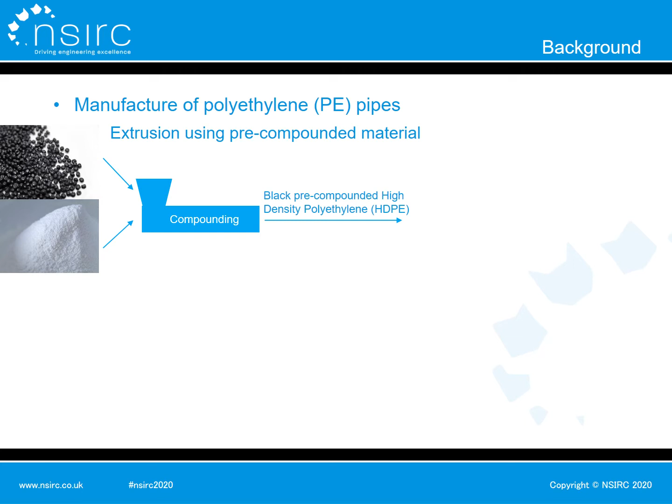There are two manufacture processes of polyethylene pipes. One is single-screw extrusion using pre-compounded material, in which carbon black master batch granules and high-density polyethylene powders are first compounded using a mixer to produce a black pre-compounded HDPE. Then the black HDPE is fed into a pipe extruder to produce a black polyethylene pipe with good homogenization of carbon black and HDPE.

Another manufacture process of polyethylene pipes is inline single-screw extrusion, in which a dry mixture of carbon black master batch granules and HDPE powders are fed into a pipe extruder directly to produce a black PE pipe. In this manufacture process, insufficient homogenization may occur because of improper screw design or using improper mixing elements.

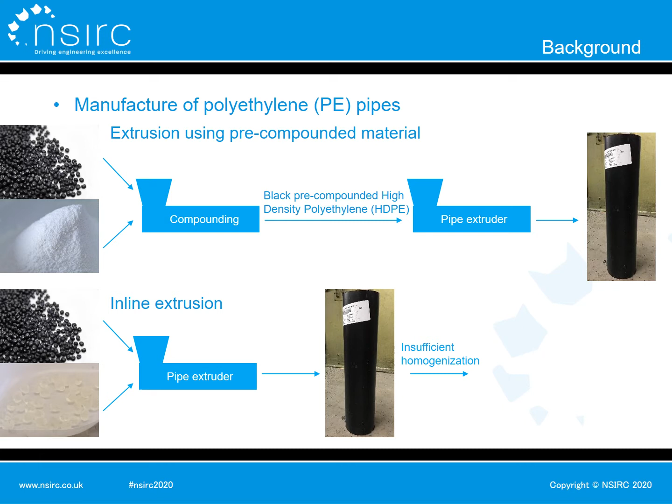Although the pipe made by inline single-screw extrusion may seem totally black by naked eye, when cutting a thin layer from the pipe end, some white regions can be seen. If we magnify and focus on one small white region, we can see some white striations or swirls with no carbon black, and black regions with high carbon black concentration surround the white striations.

These white striations are called windows. The existence of windows may induce stress concentration, therefore influencing the butt fusion joint integrity of polyethylene pipes. What is more, if the bond at the interface between windows and the black regions is weak, the butt fusion joint integrity of PE pipes can be significantly influenced. In addition, the black regions with high carbon black concentration may need to be concerned as well.

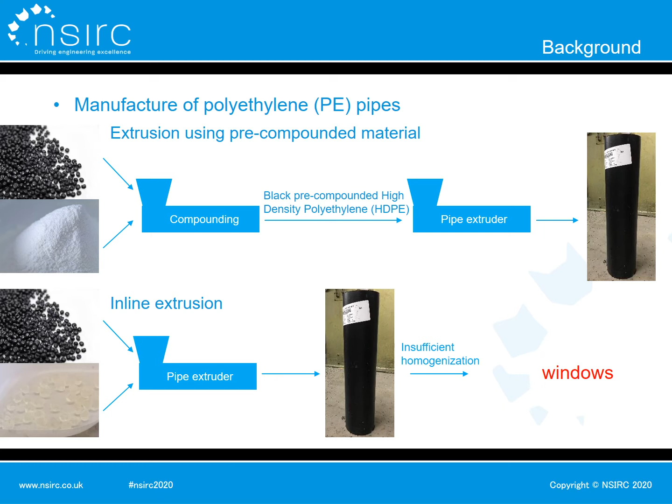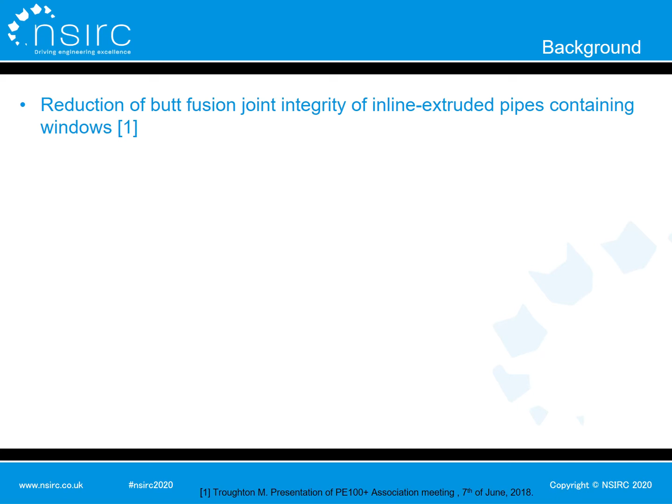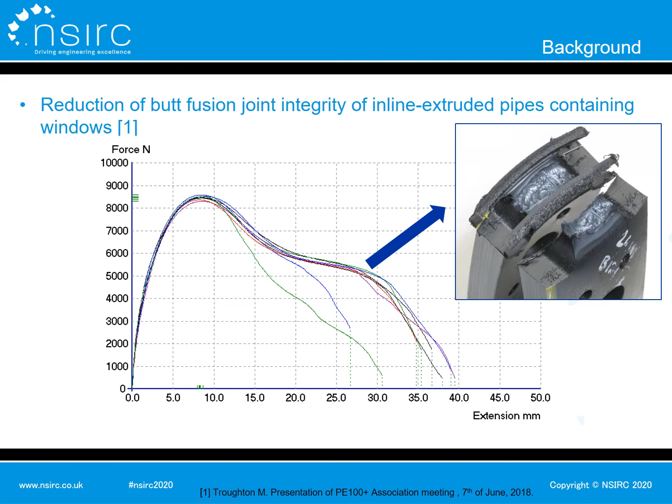TWI has done a study of the butt fusion joint integrity of polyethylene pipes containing windows and polyethylene pipes without windows. The tensile test specimens of the pipes without windows all fractured in ductile mode, with high extension to break and energy to break. The test specimens of the pipes containing windows fractured with lower extension to break and energy to break. Some brittle areas existed in their fracture surfaces.

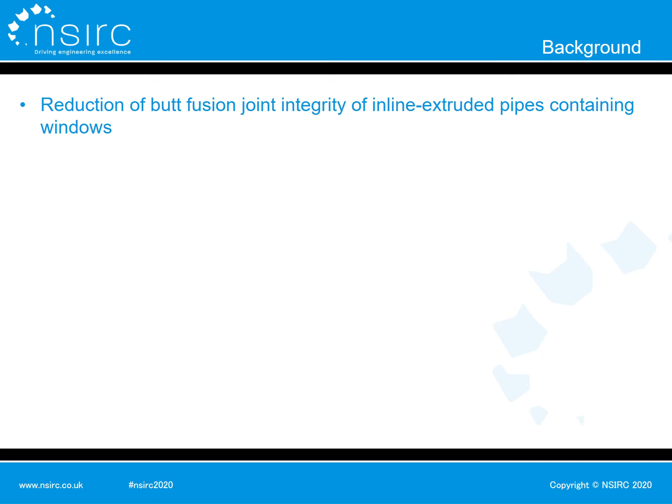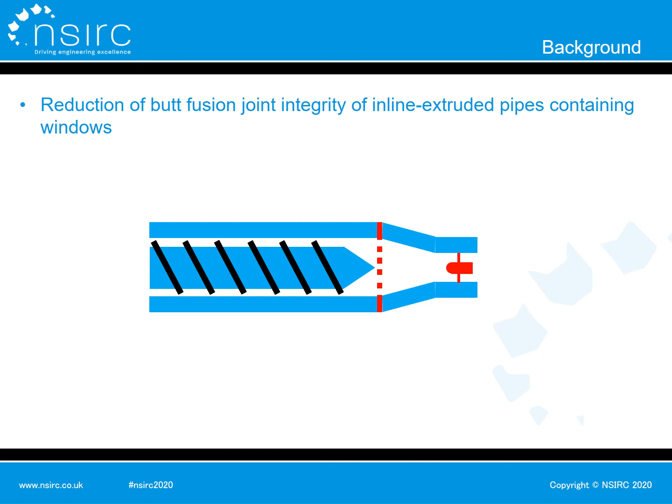In addition, poor welding between melt strands may be a reason of the reduced joint integrity as well. In single-screw extrusion, the molten materials are unavoidably separated into melt strands by flowing through some parts like a breaker plate or a mandrel support.

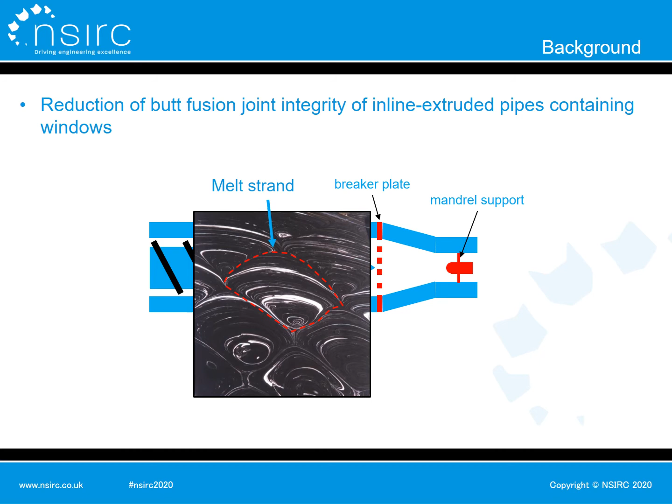For example, in this picture, each sector is a melt strand generated by flowing through a breaker plate. Then these melt strands will be welded together when flowing further away. If the welding of these melt strands is poor, the joint integrity of this pipe may be influenced.

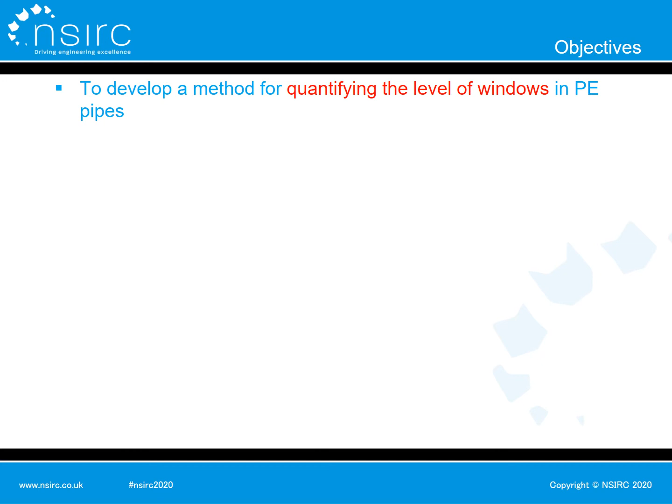So the objectives of this study are to develop a method for quantifying the level of windows in polyethylene pipes, then to determine whether there is a relationship between the level of windows and the short-term and long-term mechanical performance of the butt fusion joints of polyethylene pipes.

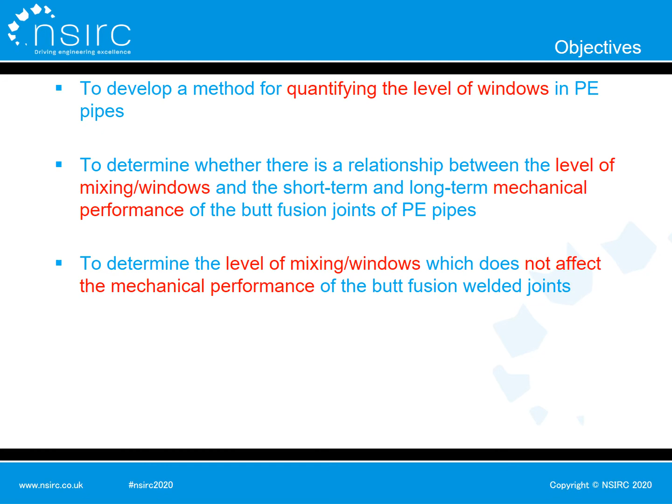If there is a correlation between the two, then determine the level of windows which does not affect the mechanical performance of butt fusion welded joints, and try to determine whether the root cause of reduced mechanical integrity of butt fusion welds is due to poor weld between melt strands, areas with high carbon black concentration, areas with windows, or the interface between the two within the extruded pipe.

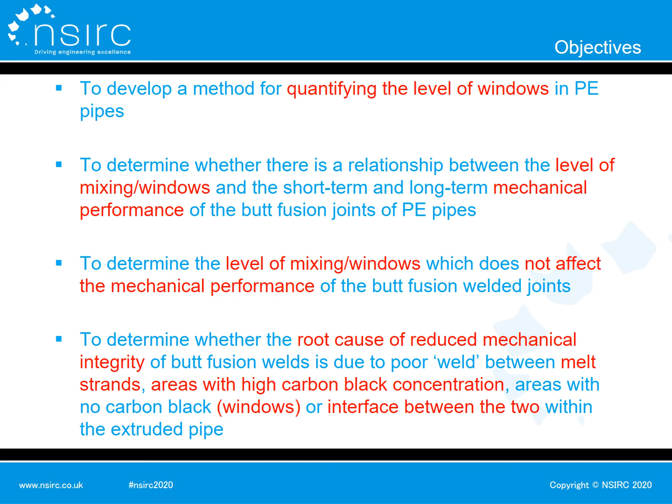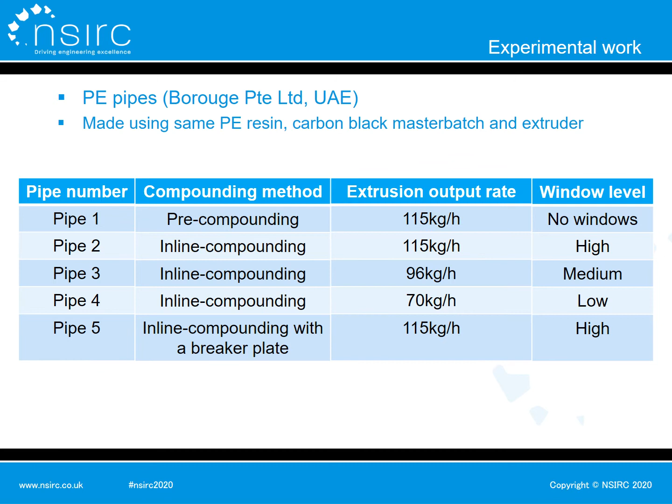To achieve the objectives, 5 kinds of PE pipes with different levels of windows provided by Borouge were welded for mechanical tests. All the pipes were made using the same polyethylene resin, carbon black master batch, and extruder. The different levels of mixing in the extrusion process resulted in the different levels of windows.

Pipe 1, with no windows, was extruded using pre-compounded material with the highest extrusion output rate. Pipe 2, with a high level of windows, was inline extruded using the same extrusion output rate as pipe 1. Pipe 3, with a medium level of windows, was inline extruded using an extrusion output rate lower than pipe 2. Pipe 4, with a low level of windows, was inline extruded using the lowest extrusion output rate.

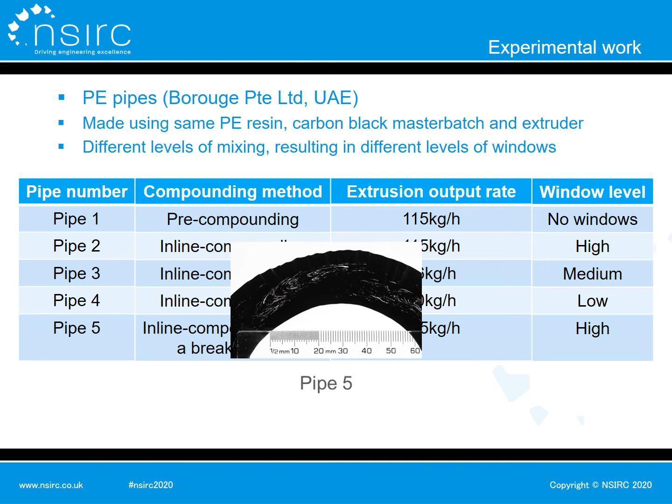Pipe 5, with a high level of windows, was inline extruded using the same extrusion output rate as pipe 2, through a breaker plate.

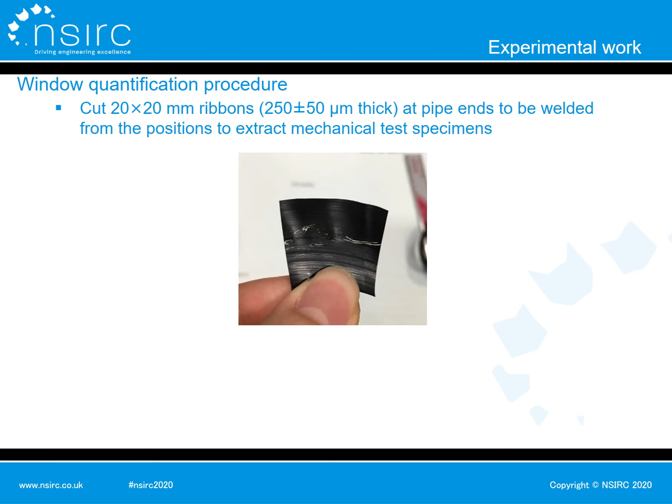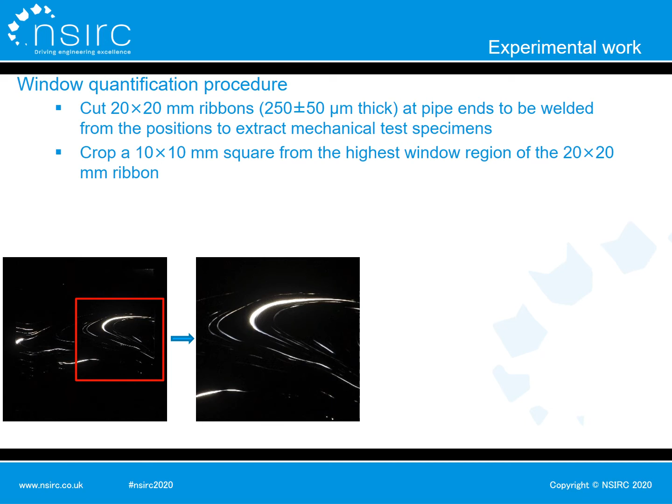To quantify windows in a test specimen, a 20 by 20 mm square with thickness of 250 plus or minus 50 microns was cut at pipe ends to be welded, from the positions to extract a specimen. Then a 10 by 10 mm square was cropped from the highest window region of the 20 by 20 mm ribbon like this. After that, all pixels in the 10 by 10 mm square were converted to black and white pixels based on a grayscale threshold.

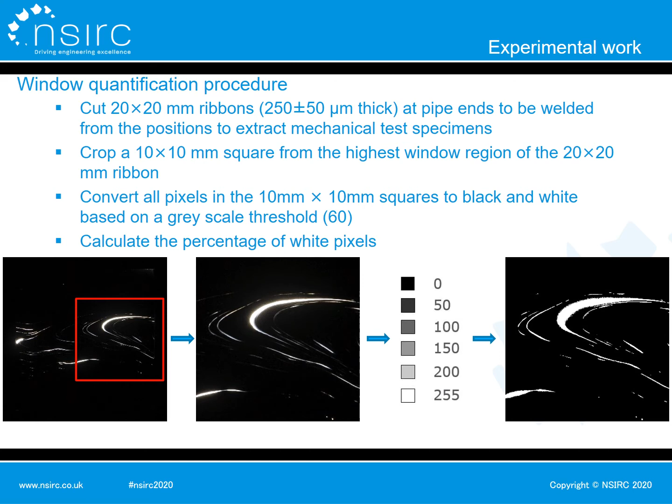Here is a scale bar of the grayscale. The grayscale of pure white is 255, and that of pure black is 0. If a pixel's grayscale is higher than 60, it will be converted to a pure white pixel, otherwise it will be converted to a pure black pixel. Finally, the percentage of all white pixels was calculated as the window percentage.

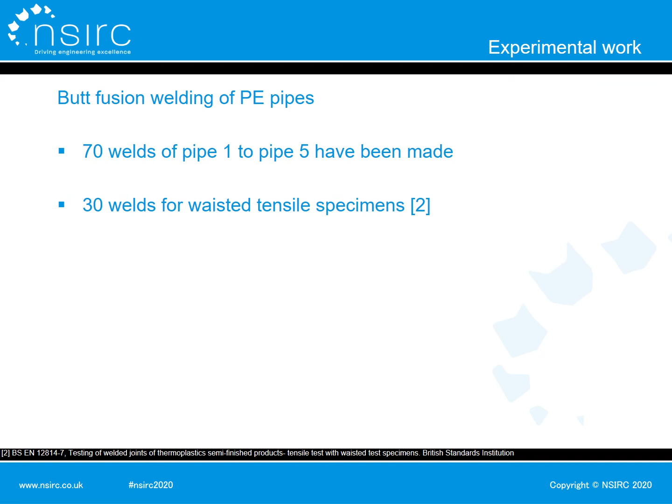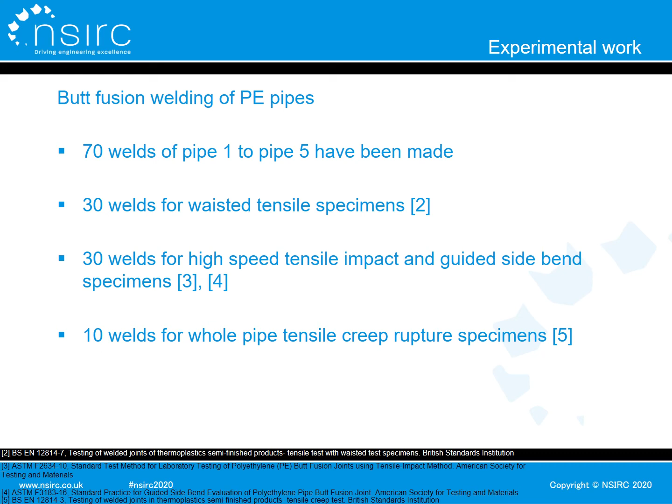So far, 70 welds of pipe 1 to pipe 5 have been made. 30 of them were made for waisted tensile specimens, 30 of them were made for high-speed tensile impact and guided side bend specimens, and 10 of them were made for whole pipe tensile creep rupture tests. Here is an example of a joint made for a waisted tensile test.

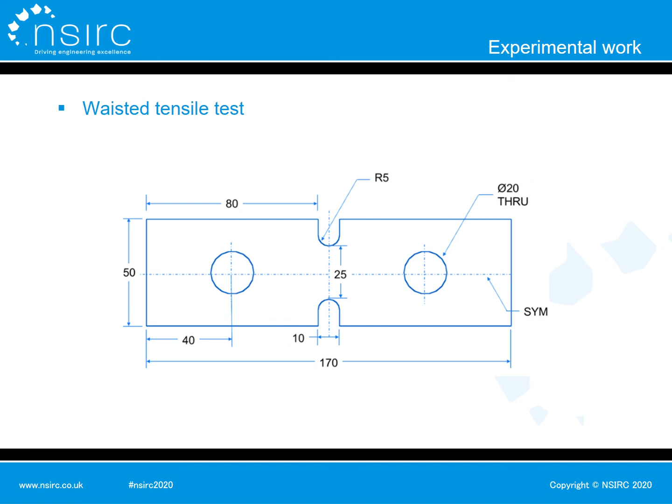Here is the geometry of a waisted tensile test specimen with a length of 170 mm, width of 50 mm, and a reduced waist in the middle. 2 specimens were extracted from one joint, opposite to each other. Here is an example of a waisted tensile test specimen.

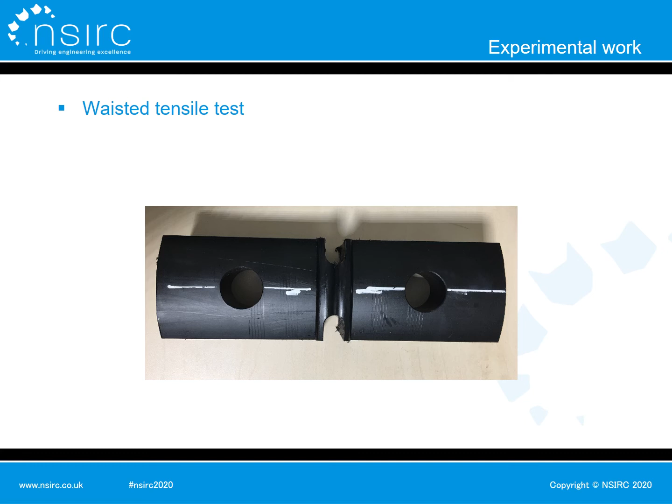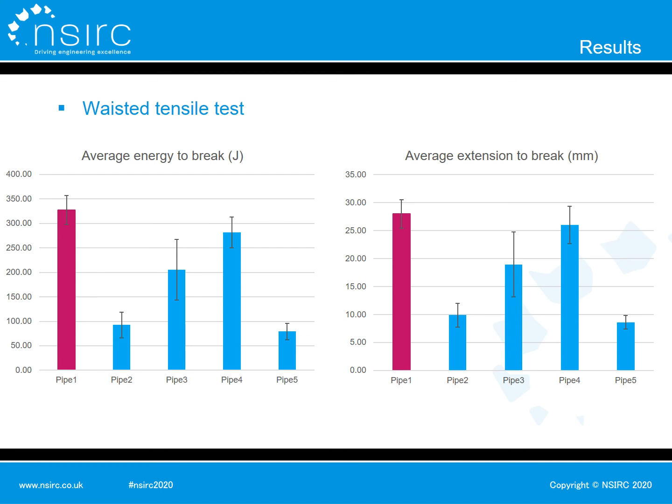Now let's look at the results of the waisted tensile test. As expected, the average energy to break and the average extension to break of pipe 1 with no windows is the highest. Pipe 4 with a low level of windows has the best performance of all pipes containing windows, but its properties are still a bit lower than pipe 1. Pipe 3 with a medium level of windows gives medium performance with large deviation. Pipe 2 and pipe 5 with high levels of windows have the lowest energy to break and extension to break.

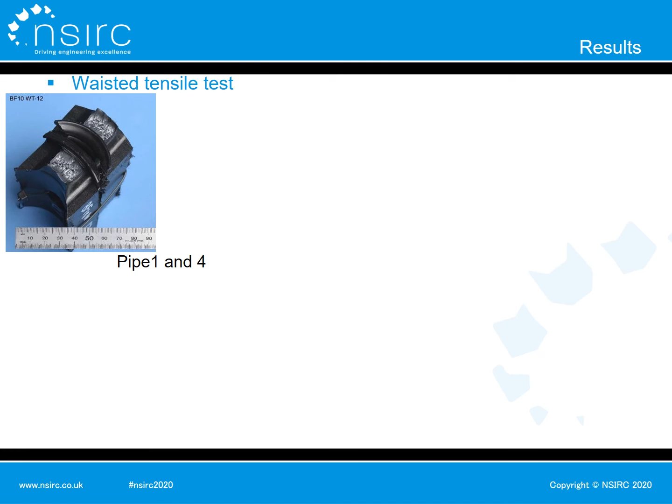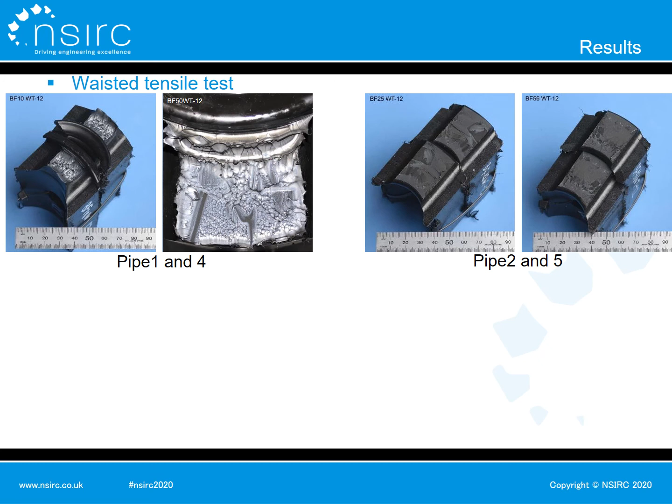For the fracture surface of each pipe side, all specimens from pipe 1 fractured in ductile mode. 11 of the 12 specimens from pipe 4 fractured in ductile mode, only 1 specimen fractured in a mixed mode with a localized brittle region. All specimens from pipe 2 and pipe 5 fractured in brittle mode. 7 of 12 specimens from pipe 3 fractured in brittle mode, 1 specimen fractured in mixed mode, and 4 specimens fractured in ductile mode, which corresponds to the high deviation of the tensile data of pipe 3.

These results indicate that the mechanical performance of butt fusion joints of polyethylene pipes decreases with increasing levels of windows.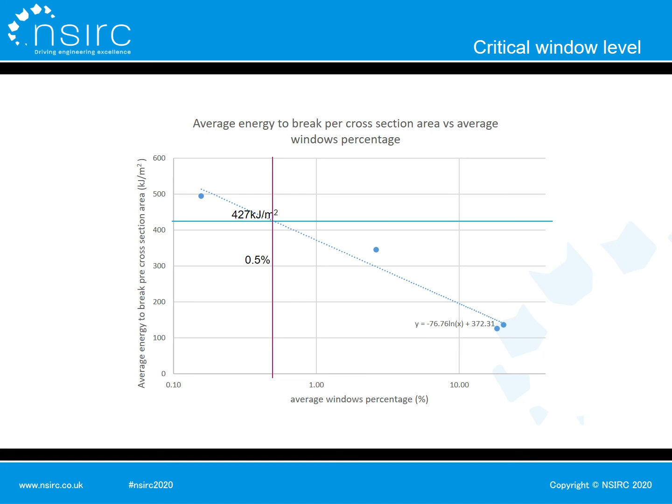There are 12 tensile specimens with window percentage lower than 0.5%. 11 of them fractured in ductile mode, only 1 specimen fractured in mixed mode, so this indicates that 0.5% is a reliable critical window level.

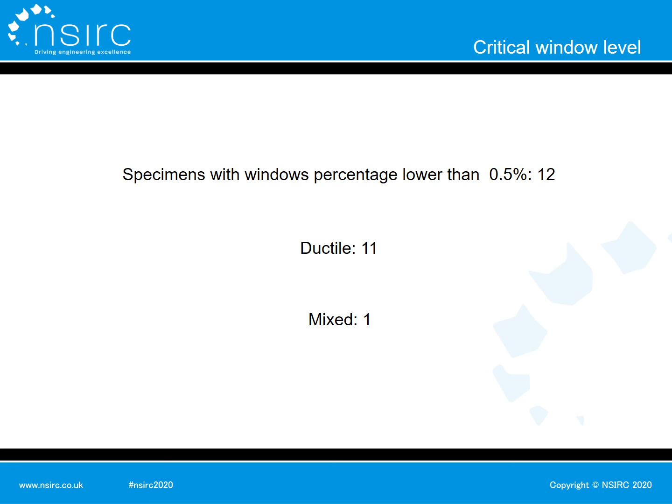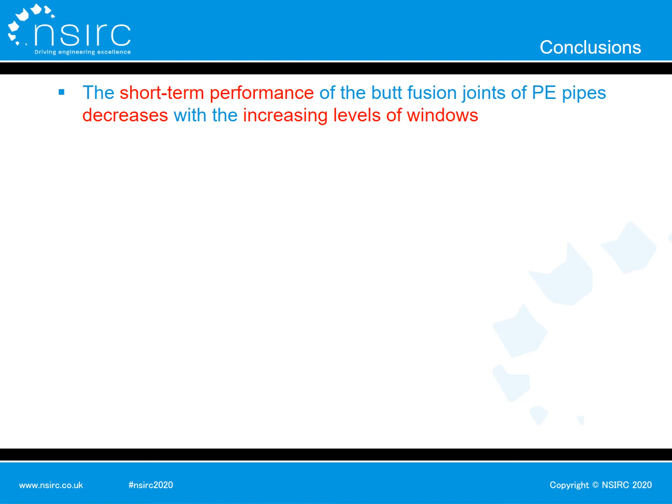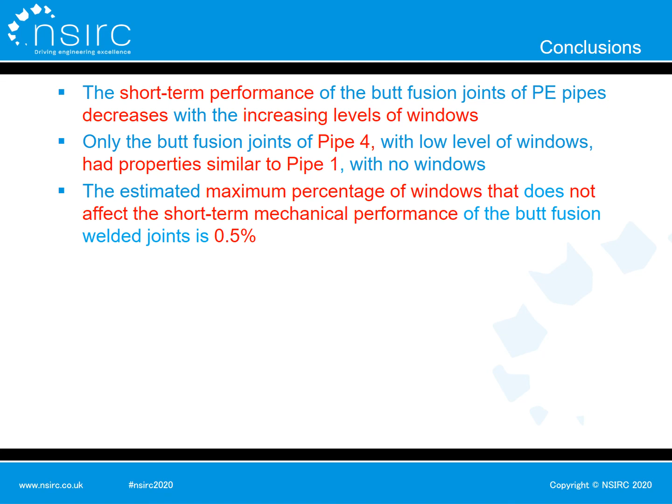In conclusion, the short-term performance of butt fusion joints of polyethylene pipes decreases with increasing levels of windows. Only the butt fusion joints of pipe 4, with a low level of windows, had properties similar to pipe 1 with no windows. The estimated maximum percentage of windows that does not affect short-term mechanical performance of butt fusion welded joints is 0.5%. The reduction in short-term butt fusion joint integrity due to insufficient homogenization during pipe extrusion is not related to poor weld strength between melt strands, because welds in pipe 1 were highly ductile.

The root cause of reduced butt fusion joint integrity is therefore either due to areas of high carbon black concentration, areas of windows, or the interface between the two.

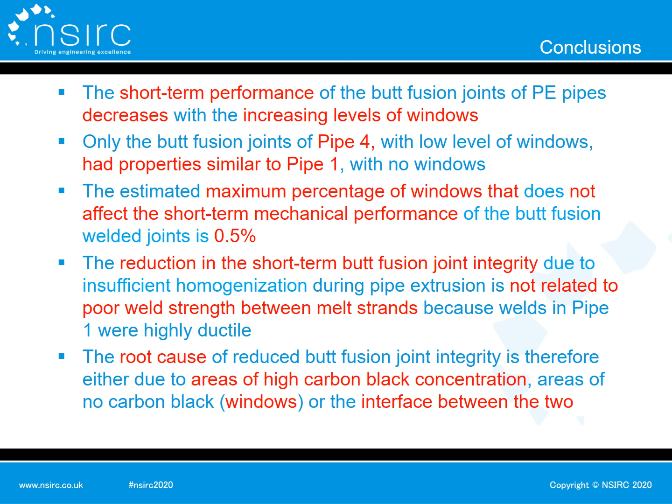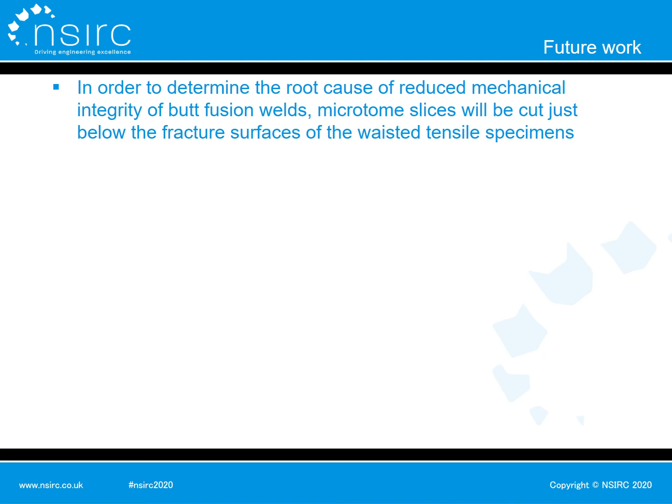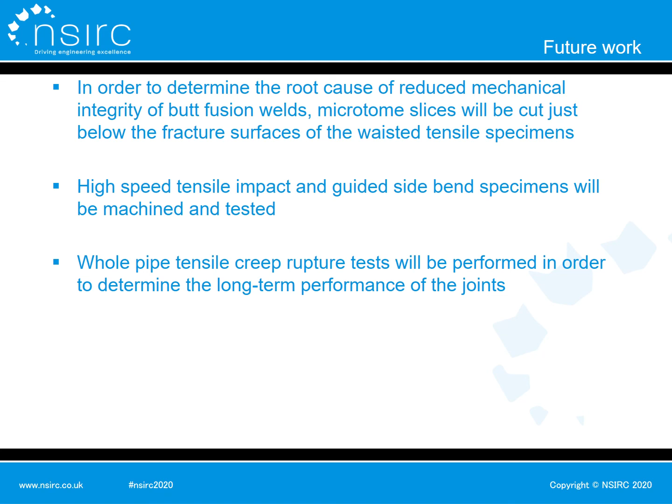In the future, in order to determine the root cause of reduced mechanical integrity of butt fusion welds, microtome slices will be cut just below the fracture surfaces of waisted tensile specimens. High-speed tensile impact and guided side bend specimens will be machined and tested. Whole pipe tensile creep rupture tests will be performed in order to determine the long-term performance of the joints.